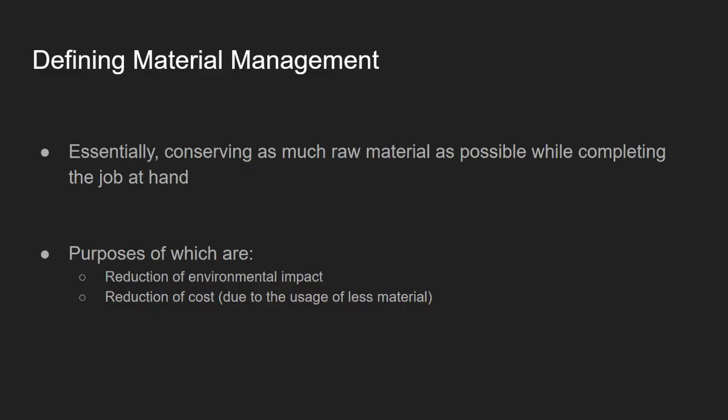Okay, so there are three ways which we can achieve this. And we're going to start with woods, and we're going to go through this with all three material types. So it's going to be woods, it's going to be polymers, and metals. Okay, so firstly, actually cutting the materials efficiently, and in some cases actually not even cutting the materials, but rather buying the materials in the size that we need them.

So if you're building something like a frame of some kind, and you need, let's say for example, I don't know, a 4 centimeter by 4 centimeter sort of strip of wood. So that would be like a square form. You would buy it in 4 by 4 centimeters rather than buying, I don't know, 8 by 4 and then cutting it in half, because then you risk wasting some material, and perhaps you also end up having to process that material yourself, which also you risk making a mistake as well.

Okay, so stock forms and stock sizes basically mean materials that come pre-processed in an existing size. And this happens in all material types. So this will happen for woods, metals, and plastics, or polymers, sorry. We'll talk about all three of them in a moment. But specifically with woods, you might be familiar with the term 2 by 4. That's a really common stock form that's used in the US, but that's in inches. So in our cases, we'll use millimeters, so the measurements themselves will be a little bit different.

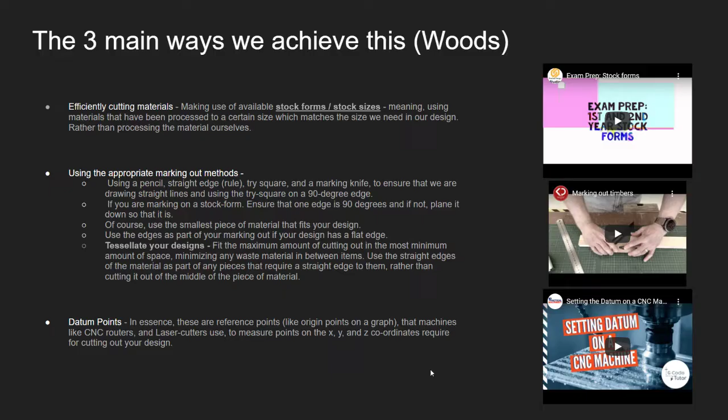And similarly, machines also have datum points or 0 points as well. And so part of our job is to ensure that the machine is zeroed correctly, but also to ensure that we've actually set the machine up in a way where it can recognize our design relative to its datum point. Okay. There's a little video on datum points down here, and it's useful to have a watch of that. But we'll go into more detail on datum points in a moment. Okay. Right. So we're going to move on here.

So we're going to look at how to achieve this with metals now. All right, so with metals, first of all, the thing to be aware of is metals have a lot more stock forms than timbers and also polymers as well. Okay, and this is because in a lot of cases it's a lot harder to trim down metals. It's a lot harder to shape them. You need a lot more tools, a lot more equipment because metals obviously are a lot harder. They're going to be a little bit more difficult to work with, and also they're going to be quite expensive.

Okay, so it's better and more efficient for us to sell metals in more stock forms so that everybody can get the sizes that they need without having to trim down so much metal and wasting all that extra metal. Okay, so one of the most efficient ways to cut metal is to not cut it at all and to buy stock forms, right? Now, if you do have to cut it, there's a couple of useful tools. One would be a center lathe, and that's in this video here. And then another one would be a milling machine like a CNC or even a manual milling machine.

However, especially with metals, but this is the same with all materials really, any material that you have to trim off or waste does still count towards the cost of the product. Even if you're trimming it down from a stock form, you do have to count the cost of that entire used piece of stock form or material towards the cost of the product.

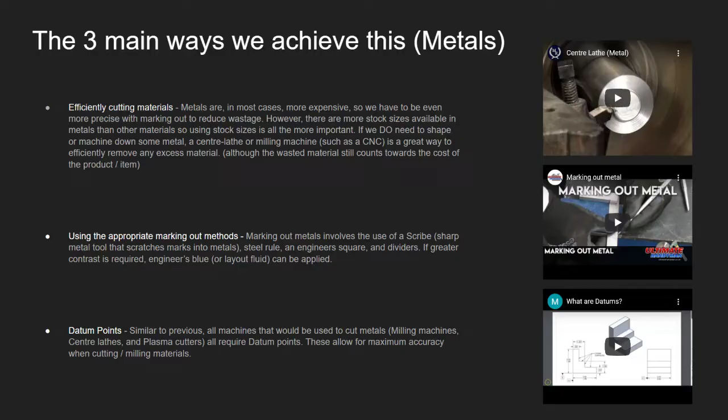A lot of times as well, the newer laser cutters will actually also measure the thickness of the material and will level the bed as well. So making sure that the bed is leveled with a laser cutter and with a plasma cutter is also a really important way to ensure that your datum points are correct.

Okay, right. So let's move on to polymers. Okay, so with polymers, of course you will know this, polymers are very often laser cut. Acrylic is a great example, but there's loads of different polymers that get laser cut, high impact polystyrene and stuff like that. And a great way to save material with that is actually tessellation again. So first and foremost with laser cutting, of course you don't need to use a gigantic piece of material if you're cutting out a small item.

Try to find the size of material that suits the size of your actual piece of work so that you don't end up with a giant piece of material with a small piece of work cut out. Otherwise, that giant piece ends up going to waste for someone who could have maybe used that whole piece of material in one go. So this is a very human-centric way of doing it. It involves us actually actively doing it. But another thing that we can do that's more of just a positive practice is something called tessellation.

Okay, and again, we talked about this before. This is a great example of tessellation here. So this image on the left shows very poor tessellation. You've got these huge gaps in between each shape, both vertically and horizontally. They're very, very spaced out. Whereas if you look over here, they're lined up to one another. And in fact, if you look closely, they've actually made the lines overlap such that a single cut can do one cut for two pieces of material.

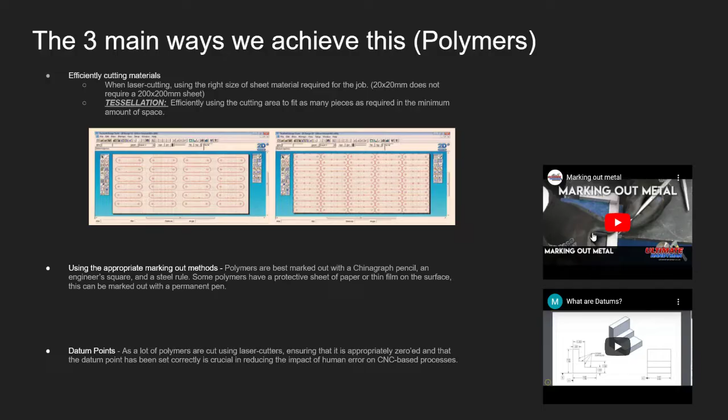That will minimize the chance of human error and therefore wastage, right? So that's a really, really big one. A couple videos here for you to just sort of visually demonstrate what I'm talking about there. Okay.

Now, finally, just going to go over the key factors of this section here, the key points. So first of all, of course, stock forms. Once again, metals do have a lot more stock forms than woods and polymers. Not to say that woods and polymers have none. They actually also have quite a lot. It's just that with metals, we really do try, in an industrial sense, to save as much material as possible, and therefore more stock forms are available. But that isn't to say that we don't have any with woods and polymers, right?

There's actually a lot. Even when you're buying acrylic tube, you can buy solid acrylic tube, you can buy acrylic rod, you can buy hollow acrylic tube, or you can buy solid acrylic rod. And then within that, you've got loads of different thicknesses. You've got really, really thick pipe, and then you've got very, very thin pieces of acrylic tube, almost like straw thickness for smaller, more intricate pieces of work.

Okay. Again, using the smallest piece of material that you can to fit all the parts of your cutting job. Now, if you're cutting 500 very, very small items and you need an entire big sheet of material, then obviously you will go ahead and do that. But you have to make sure then, if that's the case, that you've tessellated everything so that everything fits into that page as best as possible.

There's a really good example in the textbook as well. I'll see if I can drag that over here. Down here, you'll see a really good example of a nicely tessellated piece of work here. And you can see there's a lot of material being saved on these edges here as well.

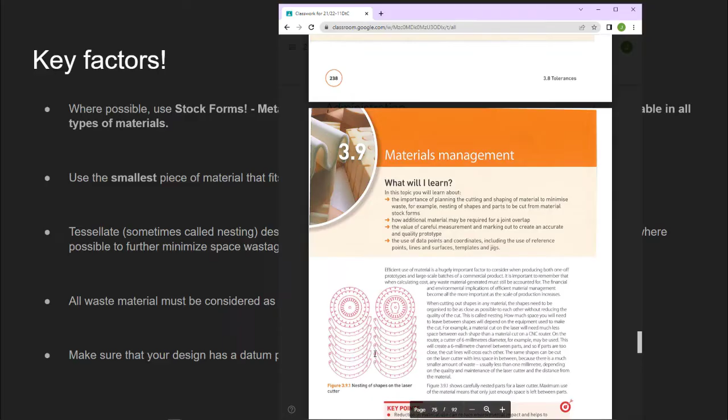Okay. Sometimes tessellation is also called nesting, but most of the time it will be called tessellating. So I recommend you just learning that term. It's a bit tricky to spell sometimes. Double S, double L. That's usually how I remember it.

Finally, waste material needs to be considered as part of the cost of the final item. So whatever you end up using as part of your manufacturing process, even if some of it gets trimmed down or wasted, that still is considered part of the cost of the final item. And therefore, we actually do try, of course, because of that, to minimize as much trimming as possible. We try to get everything in stock form as best as we can.

Okay, and then ensuring finally that your design has a datum point from which accurate measurements can be taken to any point on your design. And then of course, if you're using CNC machines, meaning computer controlled machines, that the machines have actually been zeroed and the datum point is very clear to you, so that you know that the machine is doing exactly what you expect it to. To reduce any chance for human error or any chance for mistakes to occur. Okay.